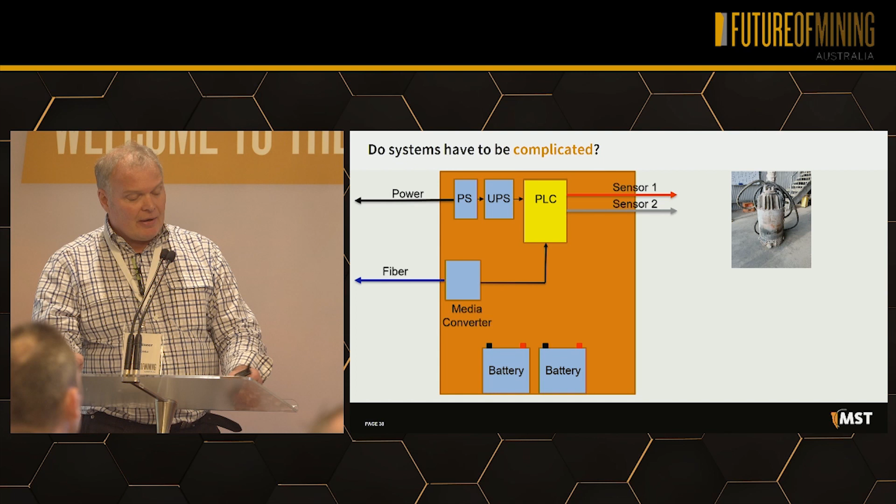So we realised this, and you don't have that just on pumps, right? You have that on the typical secondary fans, all sorts of things. We got people running back and forward, switching on fans, all this kind of stuff.

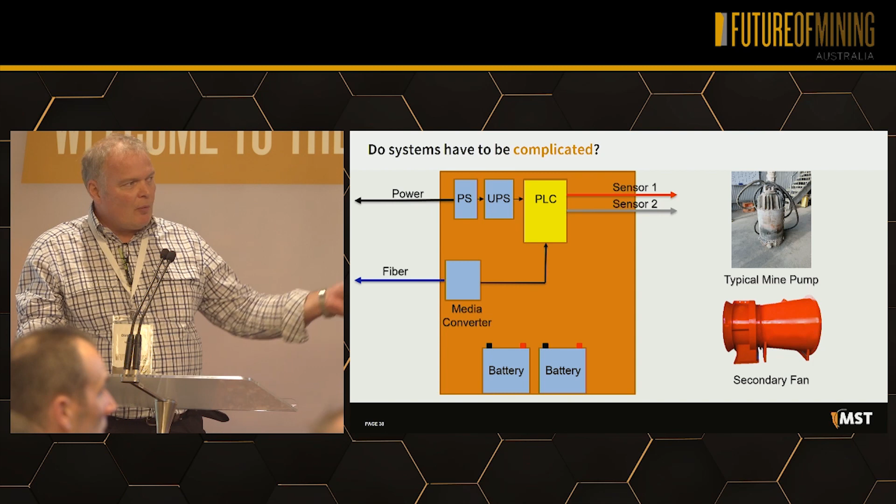This is crazy. Digital time, really? I mean, you can walk past a shop door out there and the shop door opens up automatically. When we come to a vent door, we pull on some sort of string. You've got to be kidding, aren't you? You know, that's the reality of automation. Yes, we have these centres of automation, where you have full automation, but as soon as you go away from that, it all looks very different.

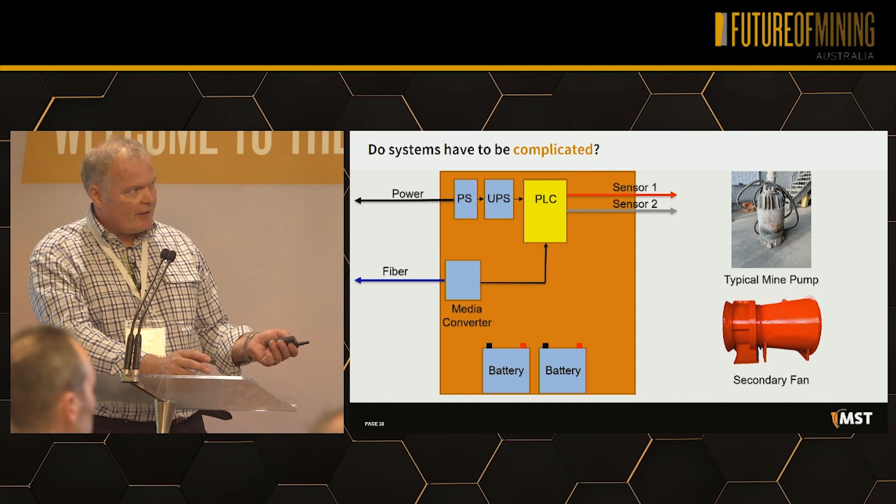So Mine Site has embarked to build a new network switch, and this network switch is a gigabit high-speed network switch, which you can easily deploy. It is ruggedized, with quick release on this thing. It's just very, very simple.

And what we did is we put an automation module in it. This is not a full blown PLC where you've got to write 50 lines of ladder code to do a basic thing. What this is, you can buy off us, you come to us and say, I want to start my fan remotely.

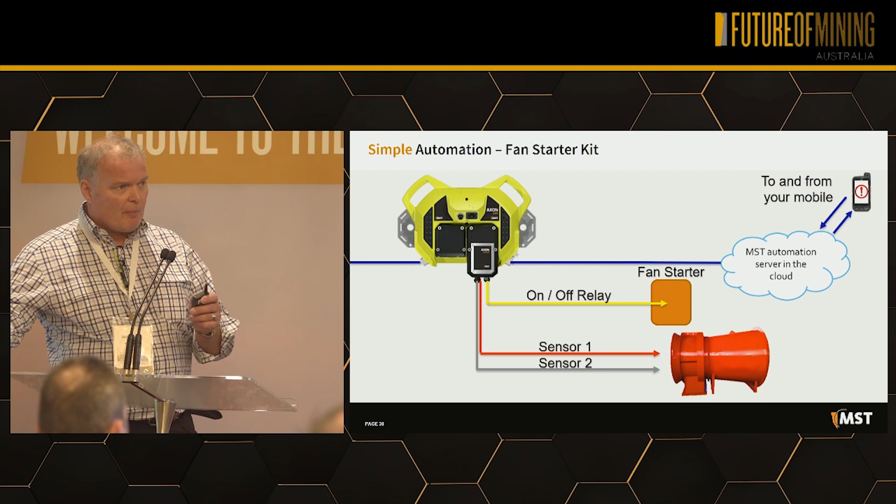Here's a fan starter kit. You plug it in with 3 cables and go into a very basic menu, electrician level, not automation specialist level. You click and pick your sensor, and the settings get automatically transferred to our ICA on the surface. You can pick who you want to notify, or who can switch the fan on and off, or measure the pump, or whatever. It turns a 6-week, 3-person problem into a system you can implement in half an hour.

So this is basically what it is: a high-speed fiber connected switch which also gives you copper gigabit connectivity, and you can attach a modular Wi-Fi unit to it. It's a high-speed Wi-Fi unit, so if you want to tram your vehicles remotely, or whatever you may want to do, you can do it.

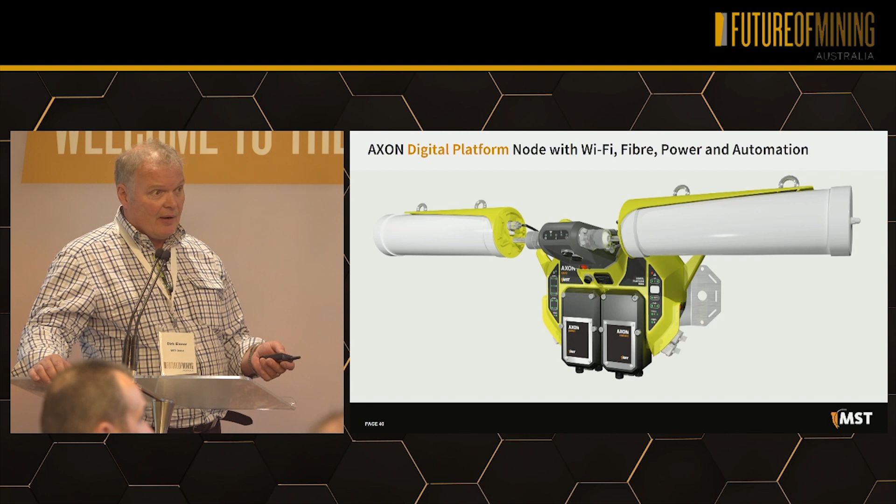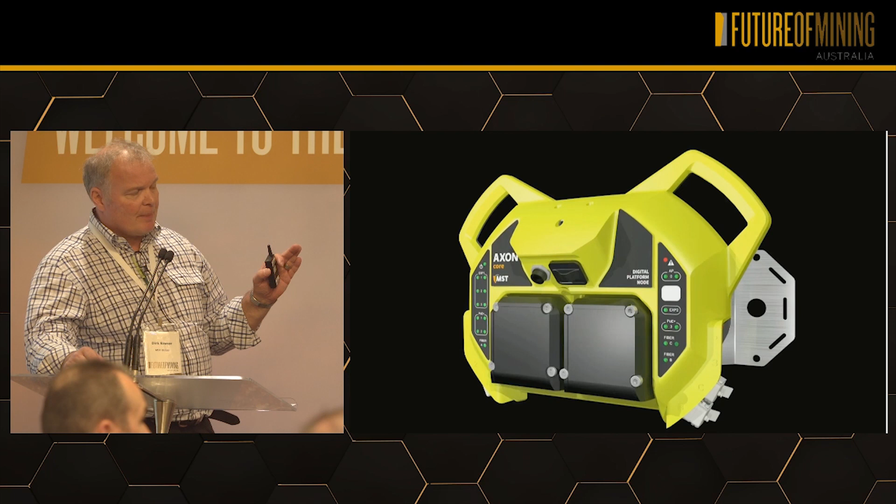Now the tricky part of the demonstration. I want to show you this switch is actually modular. As seen before, it had a Wi-Fi unit attached, but the Wi-Fi unit is completely separate from it, so you can remove it. You can stick the Wi-Fi unit on, and for the bottom modules, you can remove them and put in your control module instead.

That control module has two 4-20 milliamp loops, standard automation technology. It's got two 2-amp relays in it, and 2 digital and 2 analog ports out, and they're all easy to configure.

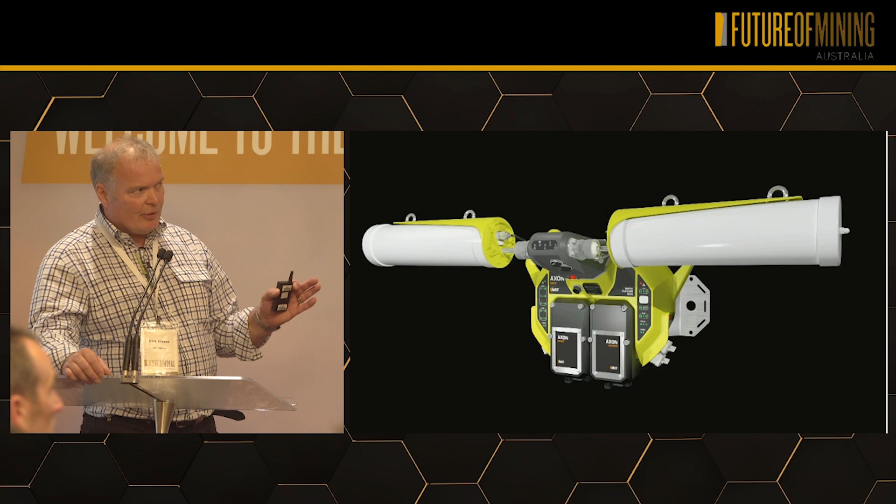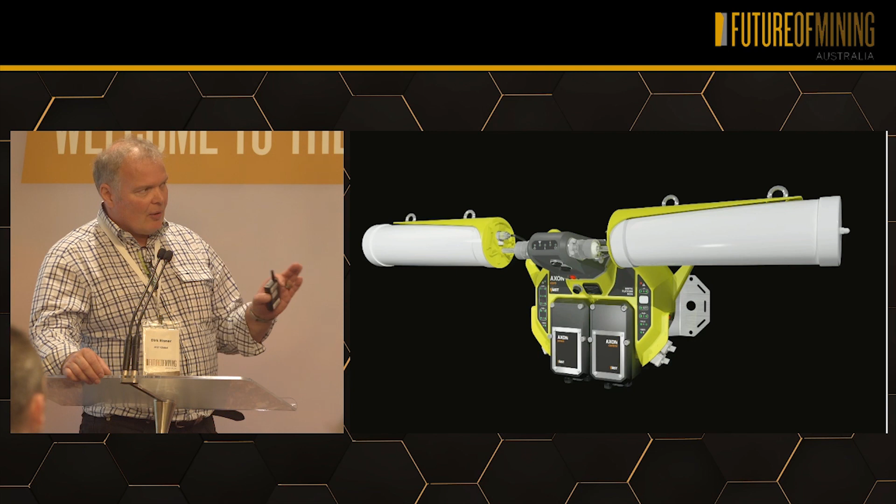Now, one thing we also realized: you go there, configure the switch, and then whoever configured it moves away. The switch breaks, someone runs into it on the wall. What do you do next? How long will it take you at 3 o'clock in the morning to recover that switch? So what we've done is put in a very smart little key.

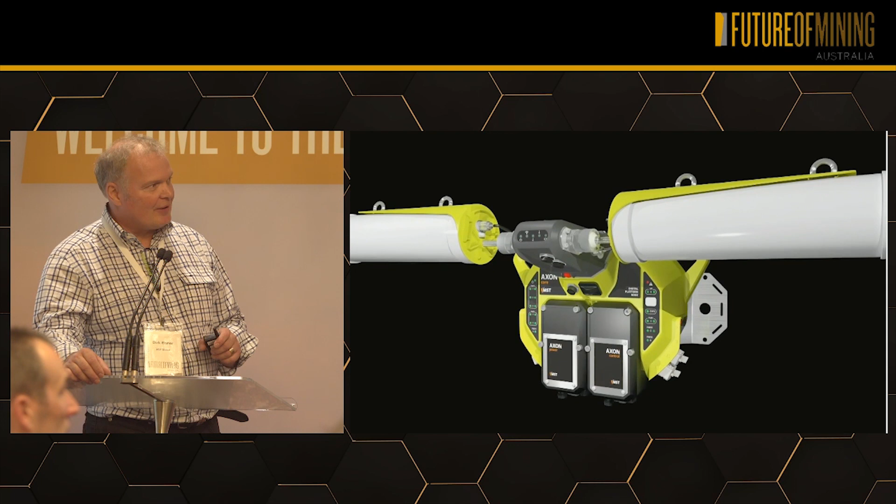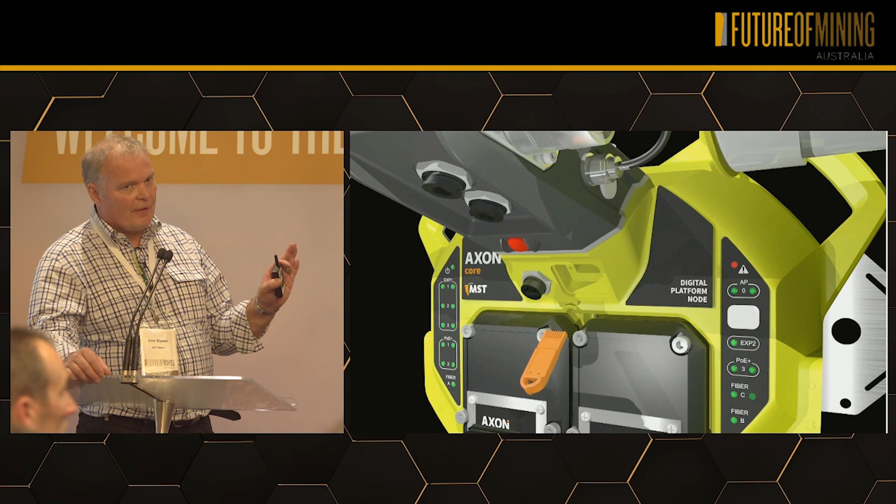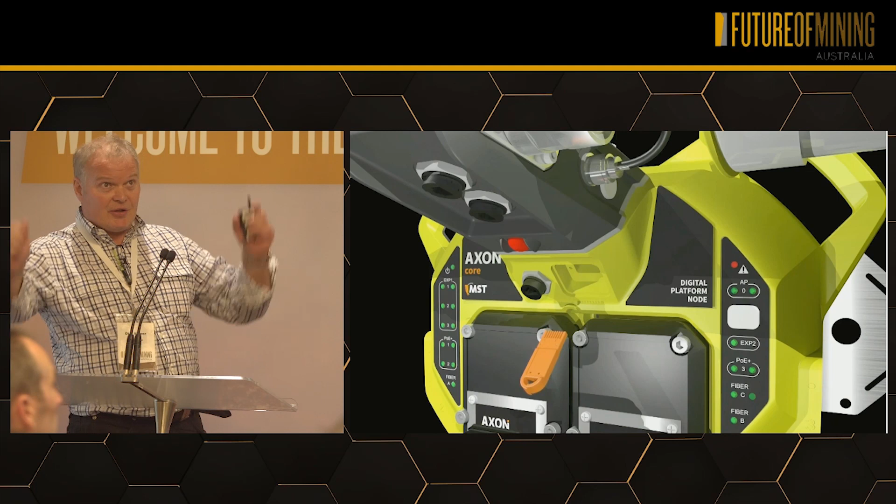Inside there is a little data key, and that data key holds the entire configuration of that switch, including all your automation modules and everything else on there. You take that switch off with a quick release, take your new one, and even the electrician can do it. He puts it on, plugs the cable back in, sticks that key back in, and surprise, surprise, it is exactly the same switch.

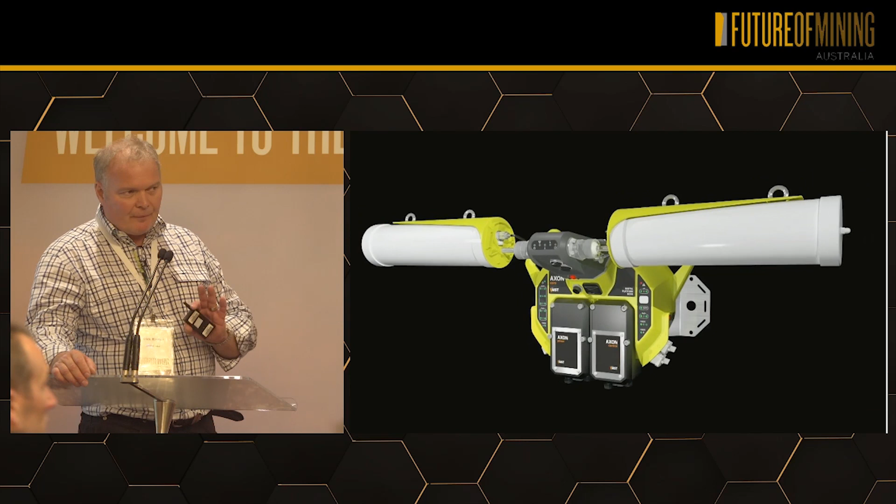There is no software configuration needed. No one needs to do anything. This is basically what we set out to do: make networks, underground and automation, useful - because most of the time we've seen people very enthusiastic about deploying these things, but after a while you come back, it's broken down, no one can fix it. The guy who built it has left the mine, and it's all over.

So we're going to add, I think, a very essential part to it - things like, you pull a cord and a vent door opens. You want to know the current - the electrician wants to know the current on a particular cable. You put it on, and you can read the current. It's very, very simple to use.